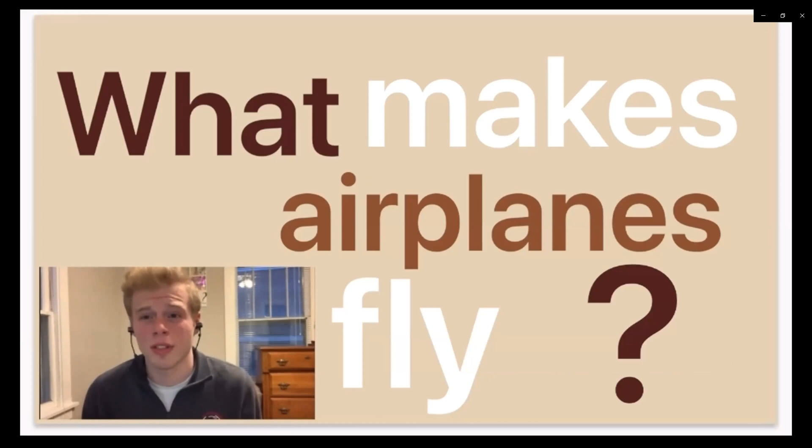I want answers from you guys. I know that when I make paper airplanes, if I throw them good enough, that they fly. Maybe if you throw something, it'll fly, but it probably won't fly very far unless you throw it really, really hard. There's four main forces that go into making something fly.

We're going to talk about each of those in detail. The first force that you need in order to fly is thrust. You have to be moving pretty fast in order to fly anywhere. You don't see a whole lot of really slow planes.

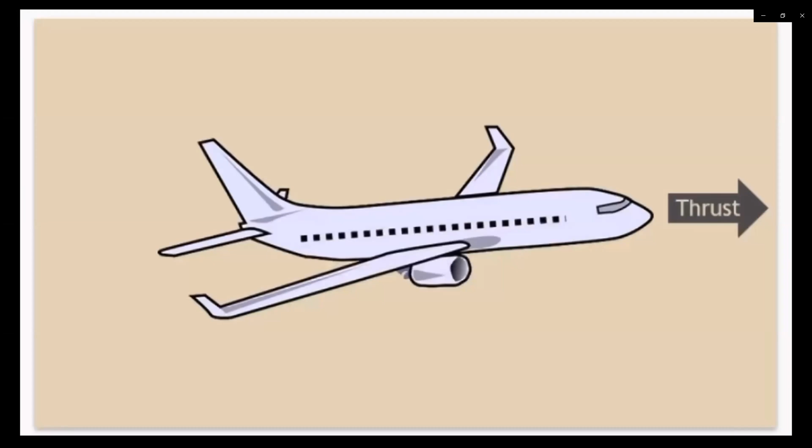A second force that's present in all types is drag. And drag is basically the friction that the air causes when it runs into the plane. We'll talk about that a little bit later.

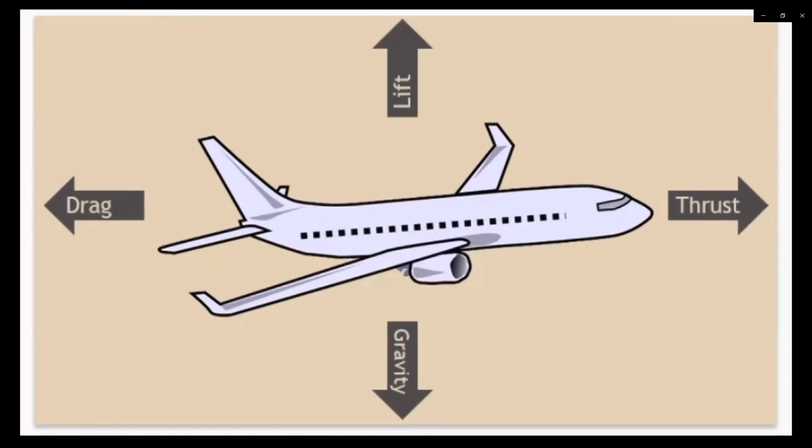A third force that's present anywhere on the world or anywhere on most other planets is the force of gravity. Gravity pulls you down and keeps you from staying in the air. And the fourth and final force we're going to talk about is lift. If you don't have any lift pushing you up, gravity will always keep you down on the ground.

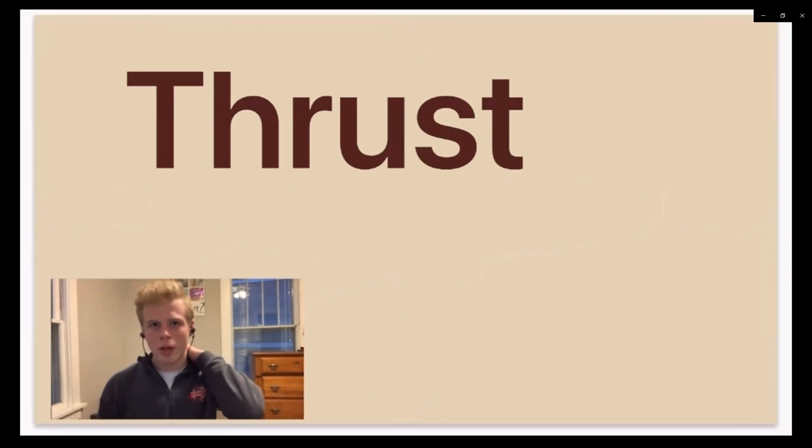First, let's start by talking about this force of thrust. Now, in order to understand thrust, we need to understand the principle of inertia. Newton's first law of motion says that objects that are at rest tend to stay at rest. And this basically is where the idea of inertia comes from. Inertia is this idea that if an object is doing something right now, it's going to want to keep doing that something in the future.

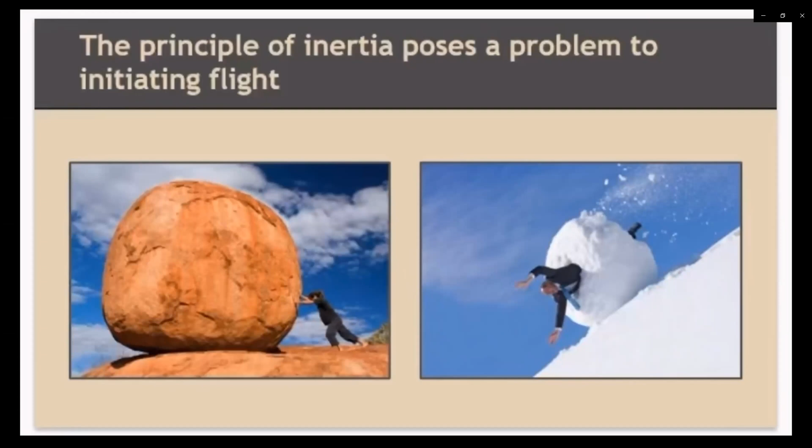So you're going to need some pretty powerful forces to get an airplane moving in the first place. The Wright brothers used very light materials in order to create enough thrust to overcome inertia. And so their plane wasn't very heavy at all. They used, as I said earlier, canvas and wood in order to make this plane really, really light.

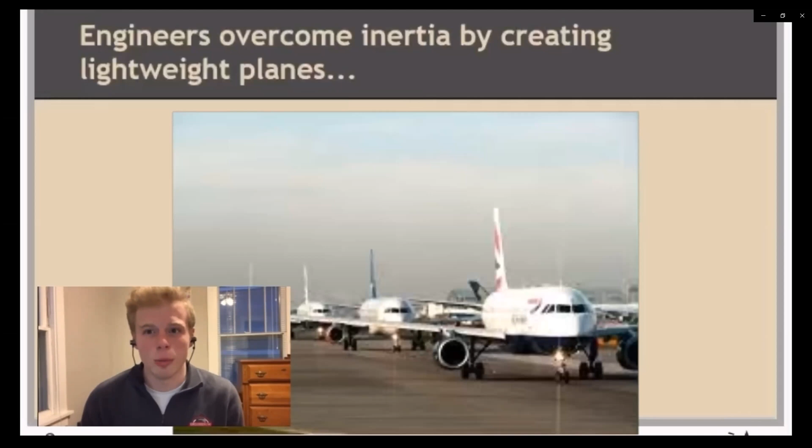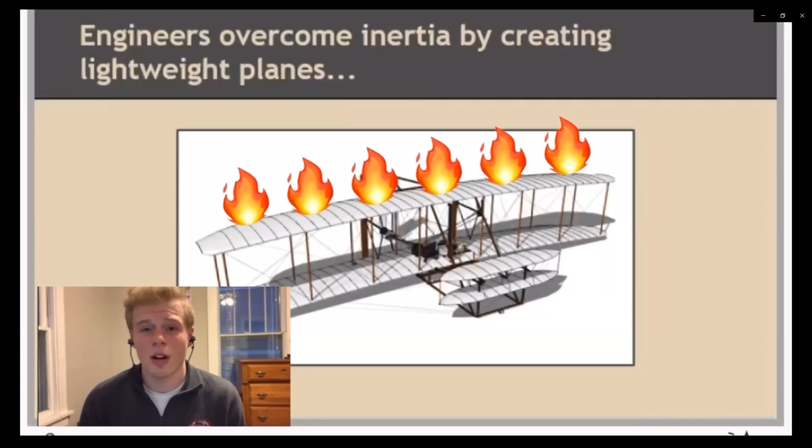And you've noticed, if you've ever been to an airport or maybe even been on a plane, that there aren't very many planes made of canvas or wood anymore. And the reason is, as engineers have found better and stronger materials, they found out that materials like metal and aluminum are actually a lot stronger than canvas and wood, and they're a lot less likely to catch on fire than canvas or wood, and they're also not all that much heavier for the amount of material that they can carry.

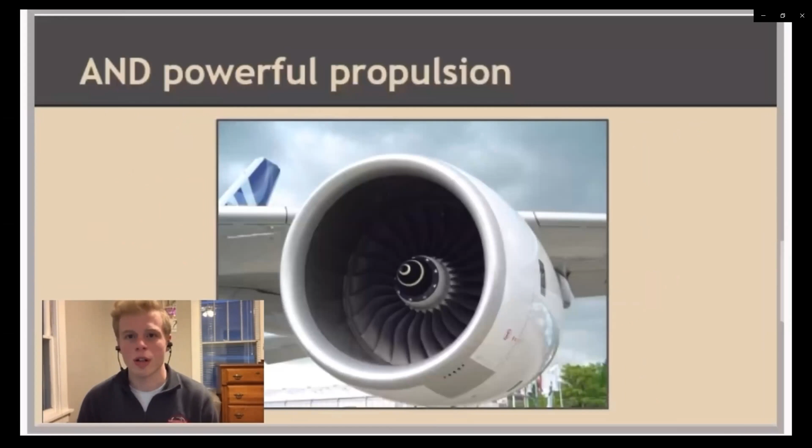So engineers have constantly been designing lighter and stronger materials in order to make the plane weigh less, which makes it easier to fly through the air. It's also really important to have powerful propulsion. The Wright brothers didn't really have any type of propulsion on their planes—they just relied on wind and catching wind in the actual canvas of the plane. But today's planes use powerful jet engines to push themselves forward and give themselves that forward thrust we talked about. All right, so the next force we're going to talk about is drag.

Drag is a result of air resistance. How many of you have ever stuck your arm out a car window while going pretty fast, and your arm wants to immediately go backwards? Well, this is actually air resistance acting on your arm. The air molecules don't really want to be moved around too much, and those push back on your arm, pulling it in that backwards motion. This same phenomenon is also happening to planes in the air. The drag is slowing the planes down, which is usually seen as bad.

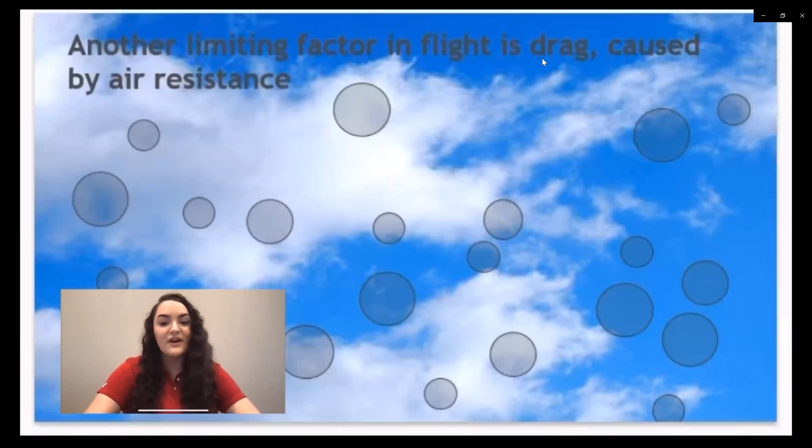However, drag can be reduced with an aerodynamic design. So what is an aerodynamic design? Essentially, it's a design that lessens the drag or air resistance. So what makes something aerodynamic, you might ask? Things like a sleek model, some divots, and a smooth surface are all really good examples of what makes something aerodynamic. Next, we're going to show you a short video to further explain aerodynamic design and how it works.

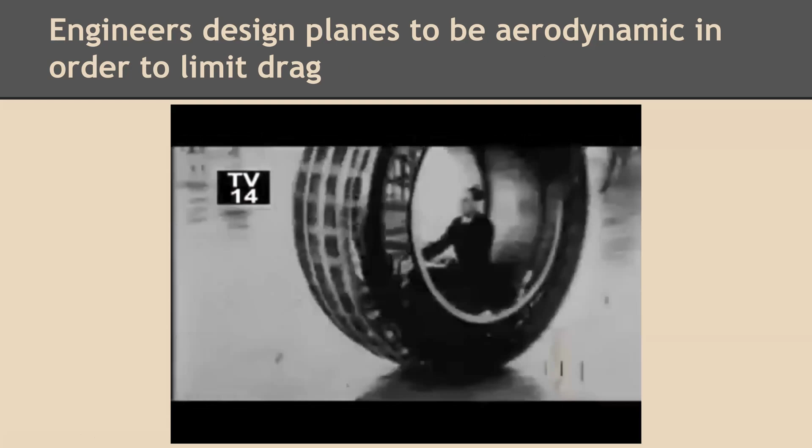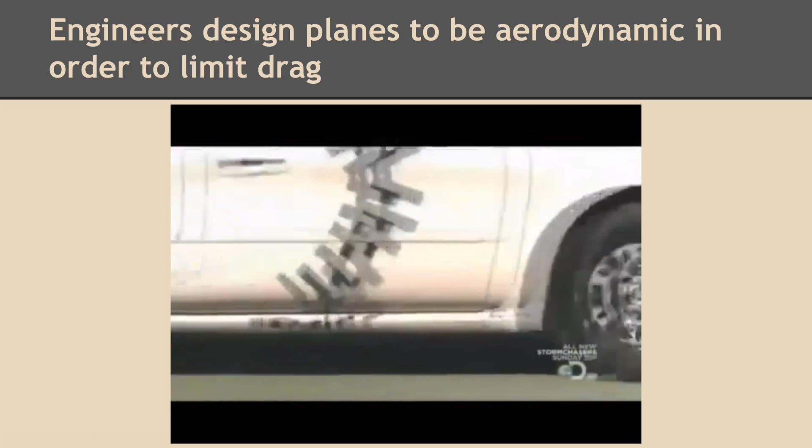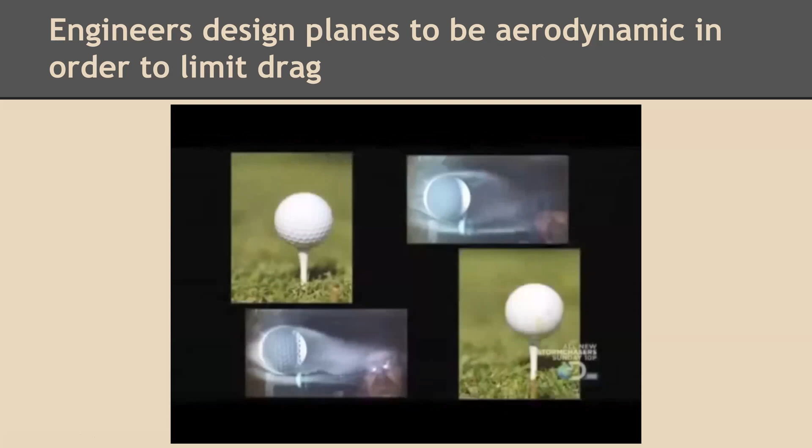Every year, millions of dollars are spent perfecting the aerodynamics of planes, trains, and automobiles. But have the MythBusters stumbled upon a dirt cheap solution? Thanks to a car riddled with dimples, it looks fantastic. Adam and Jamie have one more dirty trick to try. Remember, it's the dimples on a golf ball that cut down its drag and make it fly further.

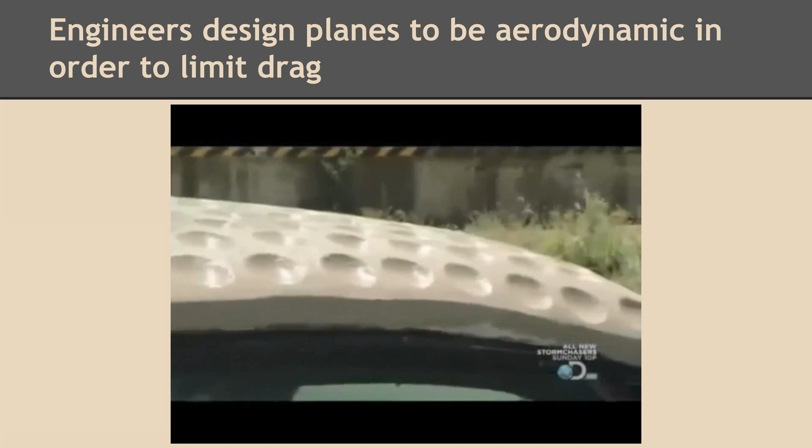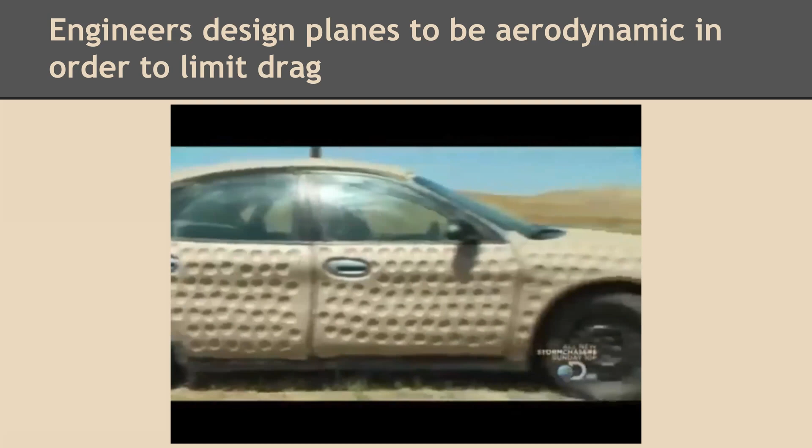So by covering the clay with these dimples, that's one dimpled car. If ever there was a car that looked like a golf ball, this is it. It might make the car more aerodynamic. This is by far one of the stranger things we've ever built, and to my mind actually one of the most beautiful, and not aesthetically either. The beauty is that we've taken the phrase 'golf ball-like effect on the car' to the furthest possible point. No one can accuse us of not going far enough.

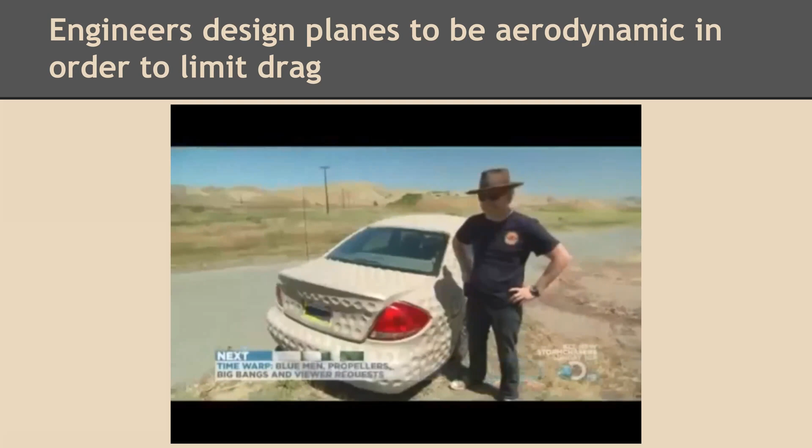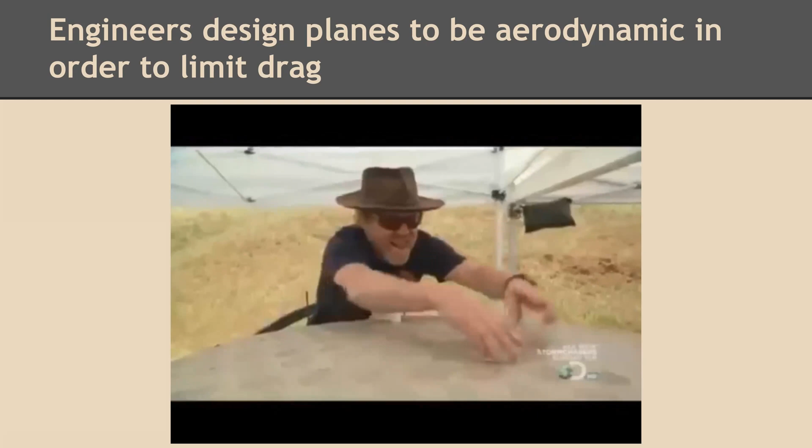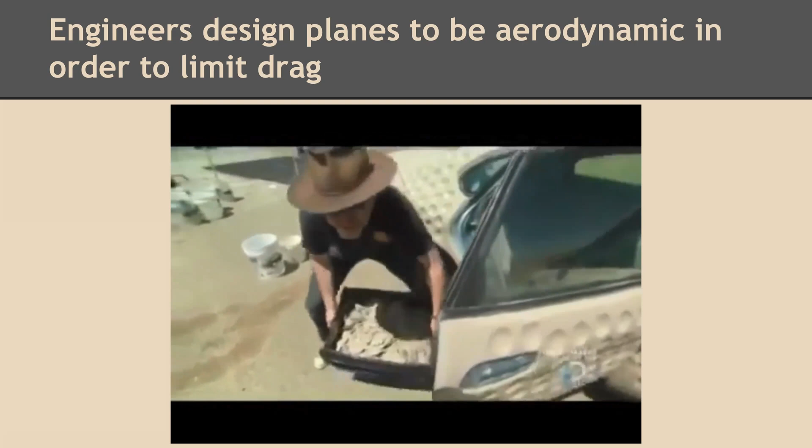Is this treatment going to translate to better fuel efficiency? I really don't think so. Adam's got his doubts, but before they test, there's one thing to make clear. Adam, I hear you say, you cut out 1,082 dimples worth of clay that significantly lightened the weight of the car, and that might translate to better fuel economy. Ye of little faith—for look here, we have every dimple we've cut out of this car, and back in it goes. Thought of everything.

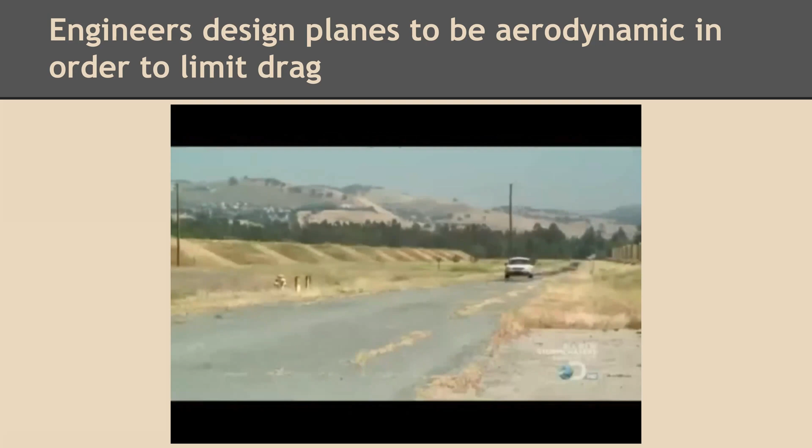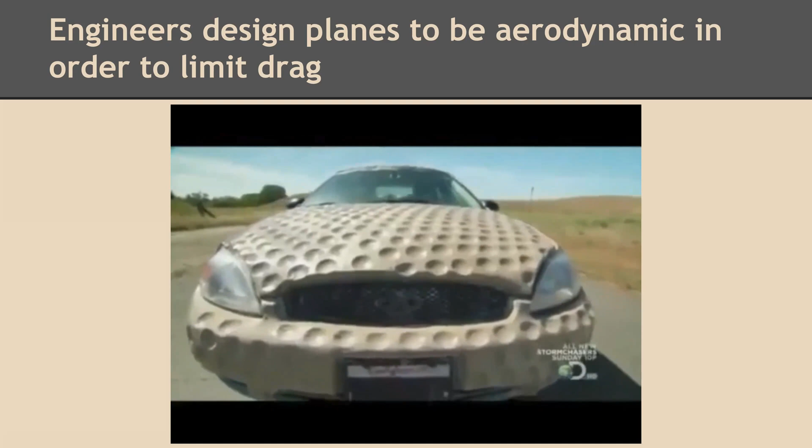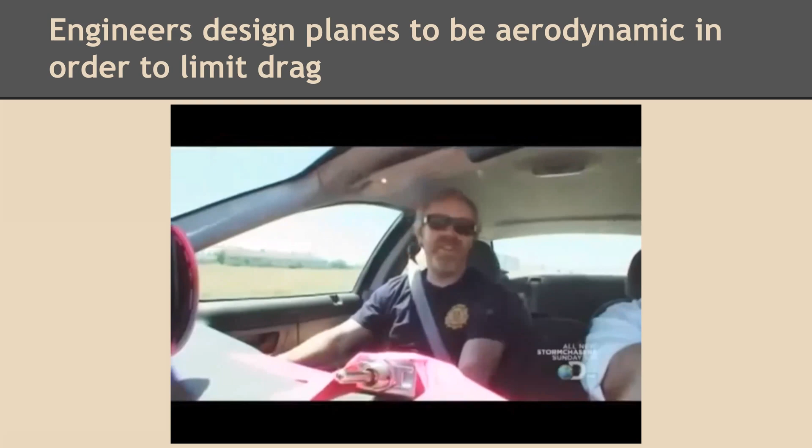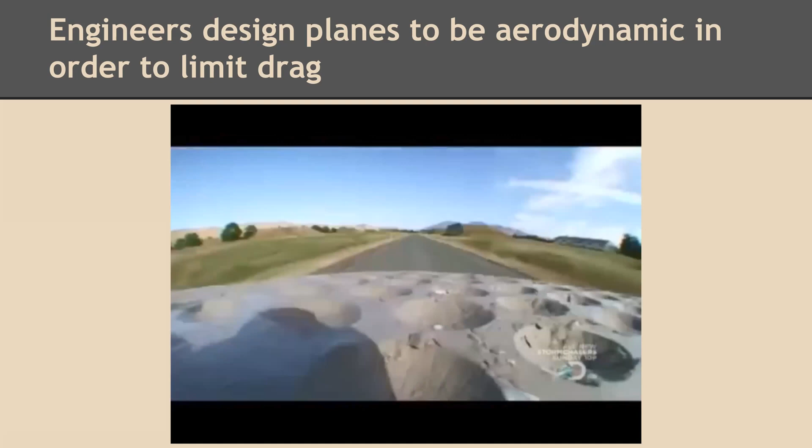Yep, everything. But will those dimples make a dent in fuel consumption? 9,450 grams, that's our start weight. Well, by now you know the drill. Main tank solenoid is on. Let's go, dimple car. Thing really is lovely. It's better from a distance. What's funny is this is absolutely the category of things that work only as long as we need them to work—it's just going to start slopping whole body parts off any minute now. But despite 5 runs at 65 miles per hour, the clay catastrophe never comes.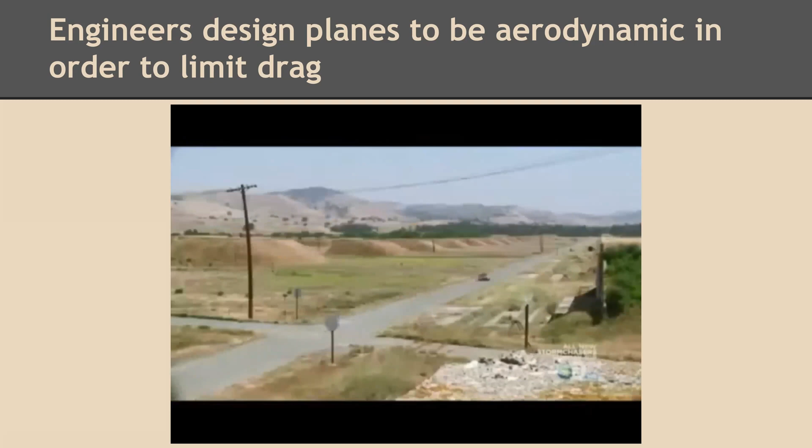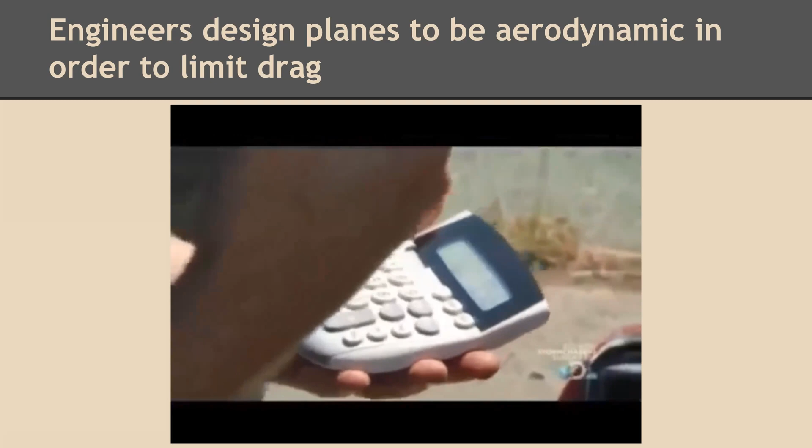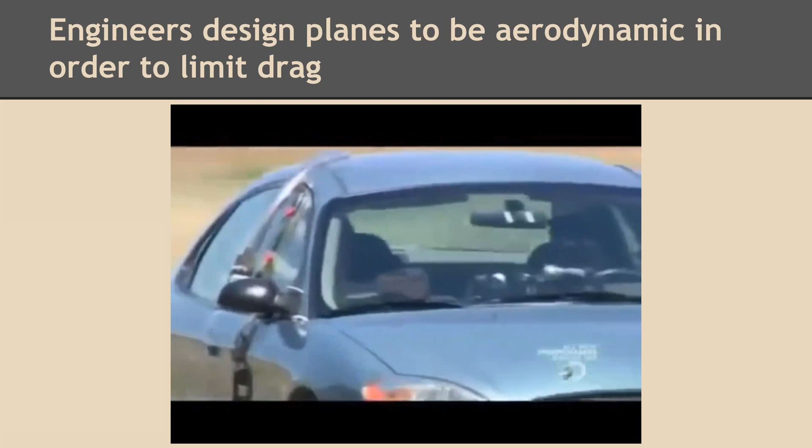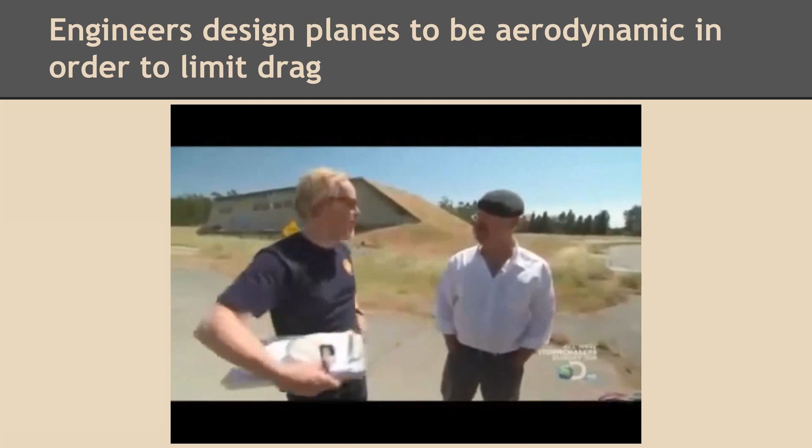So it's over to Adam. 8,972 grams. All right, time to do a little math. What you got? Okay, so the clean car without any clay on it was 26 miles per gallon and change. The clay car with no dimples was 26 miles per gallon and change. The dimpled car, 29.65 miles to the gallon. There is a golf ball like that. I feel like eating my beret. And, I'm not gonna.

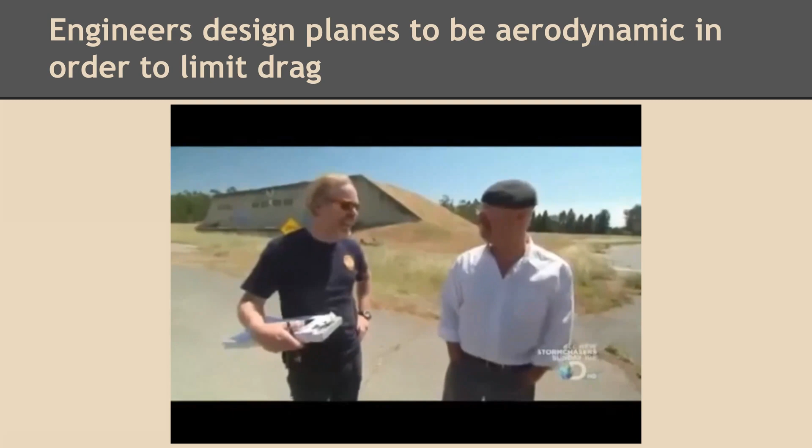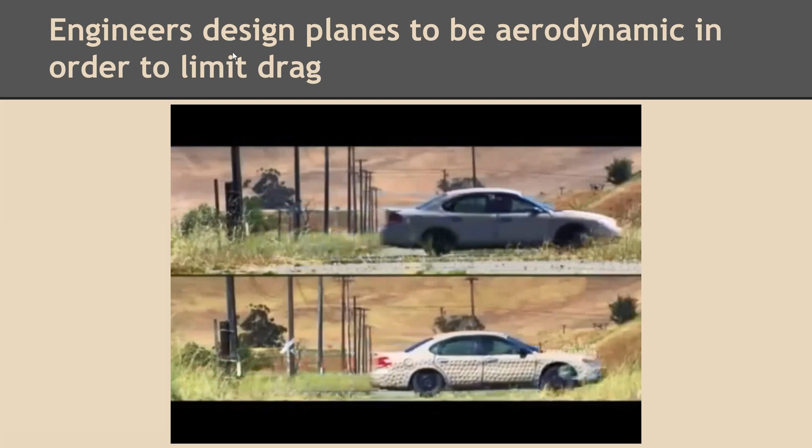We totally didn't expect that result. If we had to bet—and not being a betting person, I didn't—but if we had to bet, we would have both said, if anything, this would get poorer mileage. Like, we should have gotten something like the dirty car did. That's the coolest thing ever.

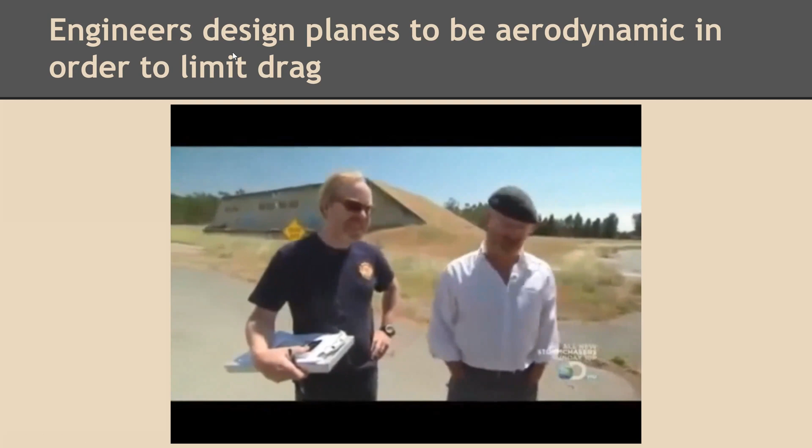To explain aerodynamic design and how it works.

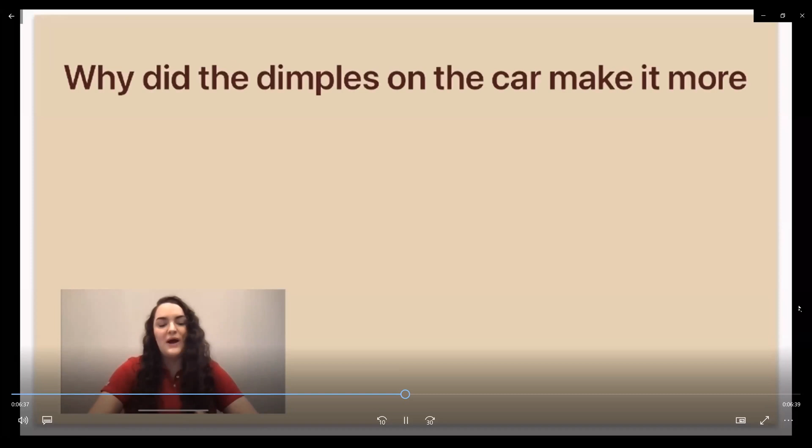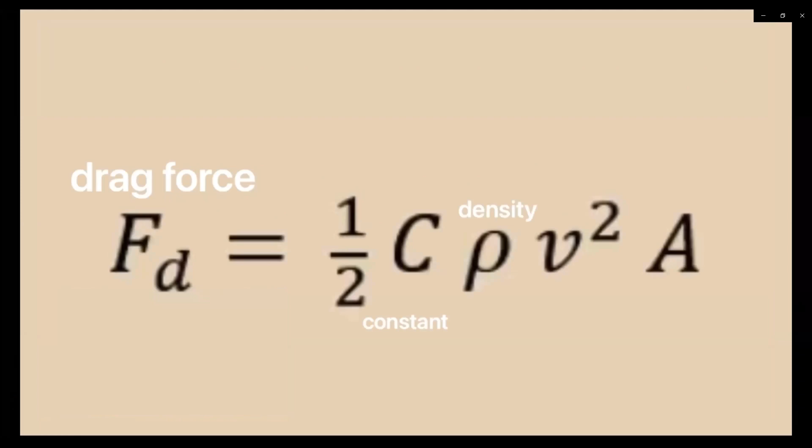Now, after watching that video, who can tell me why the dimples on the car made it more aerodynamic? Well, if you said it was reducing the surface area, you're exactly right. This can also be seen using the equation: force of drag equals 1/2 times c, the constant, times rho, known as density, times the speed, also known as velocity, times the area. Essentially the dimples are reducing the surface area of the car because when air flowed over the dimples, it had little to no friction. The air in the dimples rubbed against the air flowing over the car less than the actual car surface itself.

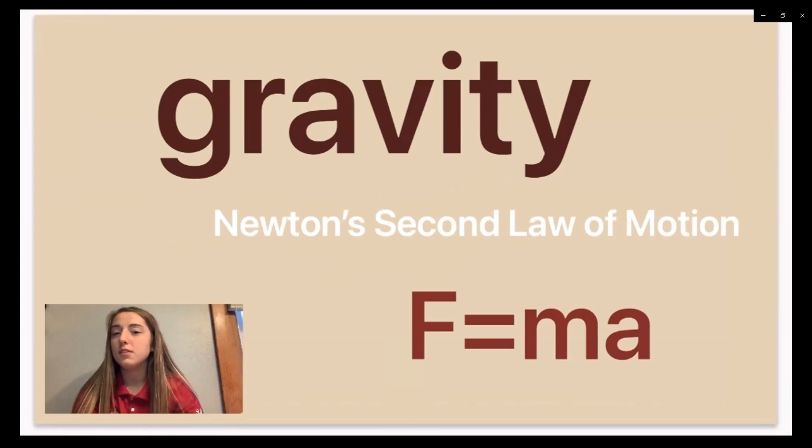The next force we have is gravity. Now we know gravity as the force that keeps us stuck to the earth. And according to Newton's second law, force equals mass times acceleration. In this case, our mass is somewhat similar to our weight, and acceleration is how fast we're speeding up.

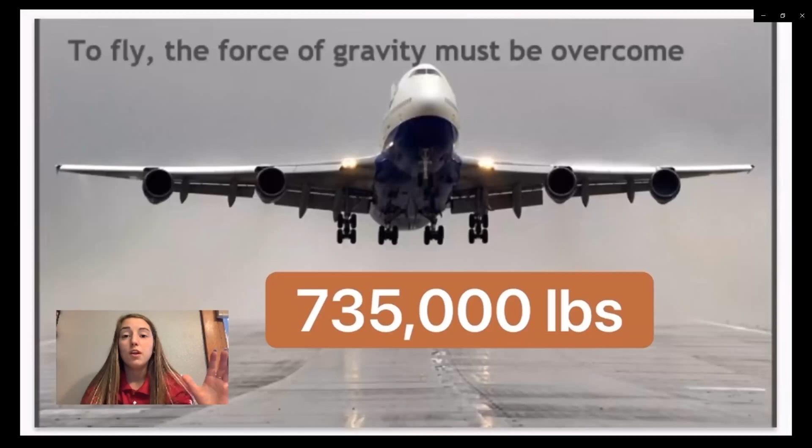Like we talked about earlier, planes have a huge mass, and so they have a huge force of gravity that has to be overcome. The force we use to overcome gravity is lift. We create this large lift force by creating a large thrust force from the plane's engines. The most important part of our planes for creating lift is the wings.

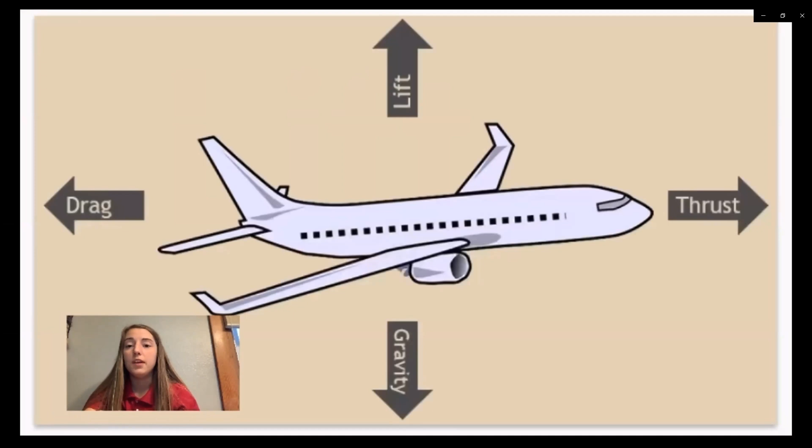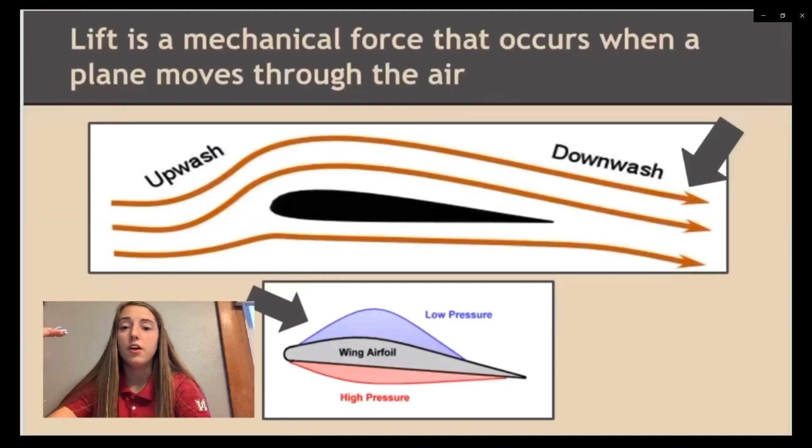These wings move air across them and create something called downwash. Downwash is where the air comes up over the wing and rushes back down the other side. This downwash causes an area of low pressure above the airplane wing, and a high pressure pocket below the wing. When you have low pressure on top and high pressure on the bottom, that lifts the plane up into the air and creates what we know as lift.

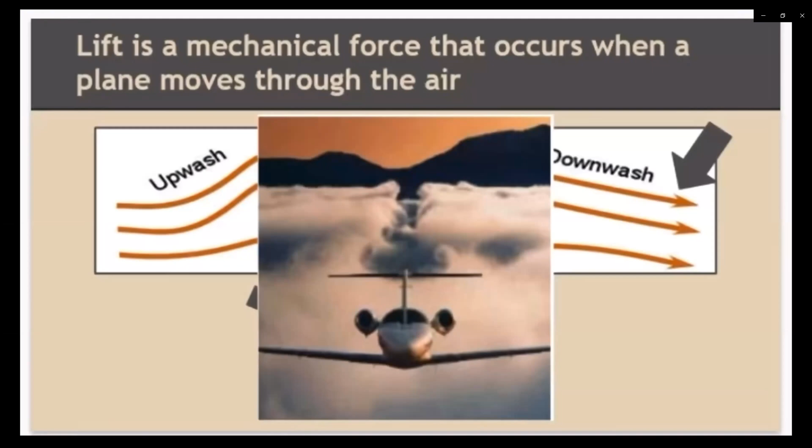Let's take a look at an example of the Bernoulli Effect in action. I have a really light ping pong ball here and a pretty powerful hairdryer. This hairdryer is going to blow a lot of air past this ping pong ball. Let's see what happens.

What was happening is all that air was rushing along the ping pong ball and it was creating lift on the ping pong ball. That's how it was able to overcome the force of gravity. It was able to create a pocket of low pressure right above it where all this air is rushing past, and the ping pong ball wants to go where it's easiest and where there's less pressure. So it was constantly being pushed up by the hairdryer, and that's why it was able to stay in line with the dryer, even when I started to tilt it a little bit, because it had that pocket of low pressure right above it.

I have a video here that I want to share with you. Before you watch it, I want you to guess: how long do you think the longest paper airplane ever flown was in the air?

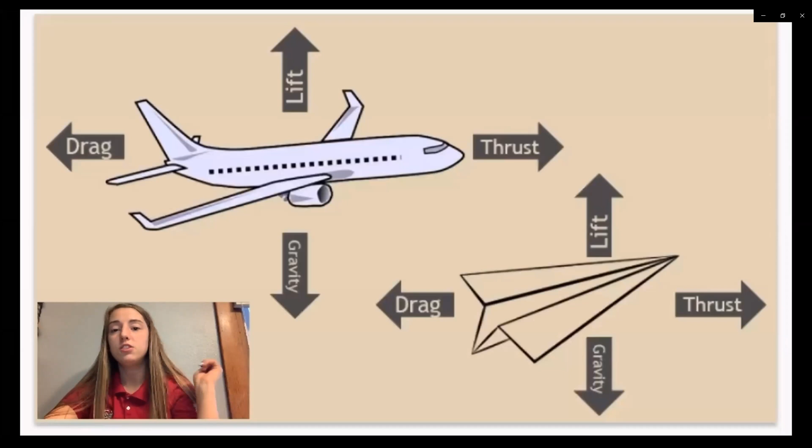Now later, we're going to do an activity where you make your own airplane. Your airplane, although it's not going to look like the huge airplanes we see in the sky, it's going to look like a paper airplane. Keep in mind, these airplanes have the same four forces acting on them: drag, lift, thrust, and gravity. The only difference is that our thrust comes from us taking the plane and launching it into the air rather than using a super special jet engine.

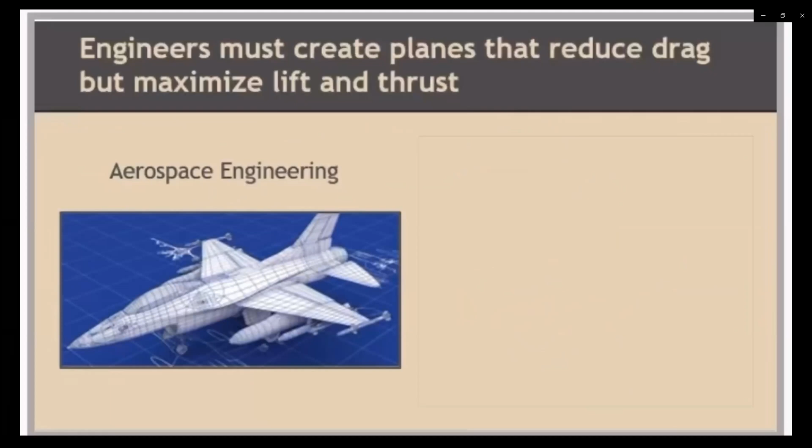Let's take a look at some of the engineers that study these forces acting on airplanes. Their goal is to reduce drag but maximize both lift and thrust. The first engineer that works on an airplane is an aerospace engineer, which is broken up into two spots: aeronautical engineering and astronautical engineering. Aerospace engineers must determine the best shape for an airplane. To do this, they must predict how the air is going to move around the plane and around the wings, using computer models and mathematical models, and then testing them in a lab.

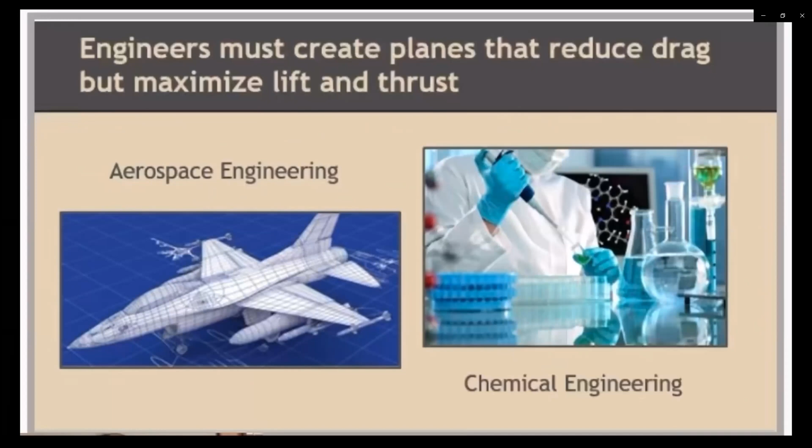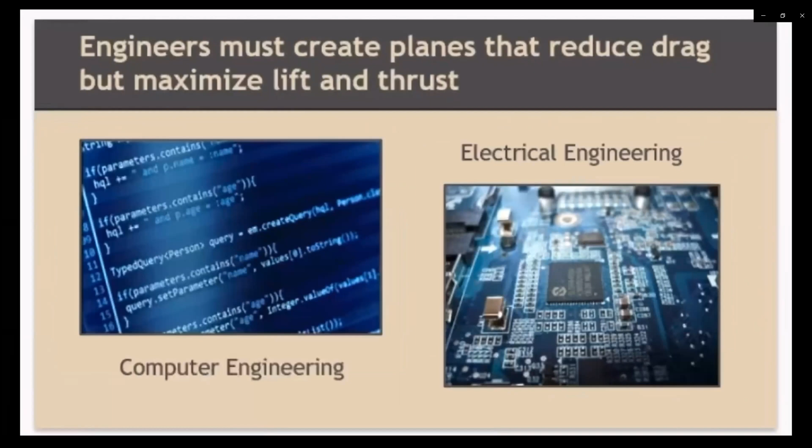Chemical engineers study both physics and chemistry, and they study this concept called combustion, which is where we get the energy for our planes from, using jet fuel. They use their studies to maximize the energy we get from this combustion process. Computer engineers design the computer programs for flight instruments, while electrical engineers work on all the pieces behind the computer, like the electrical wiring.

Earlier we talked about how heavy airplanes are. They are just so heavy, and the job of a materials engineer is to minimize that weight, making sure we use the lightest materials possible that also keep our passengers safe.

Next, we have mechanical engineers, and what they do is work on moving parts. There are lots of moving parts in an airplane, like the doors and the wings.

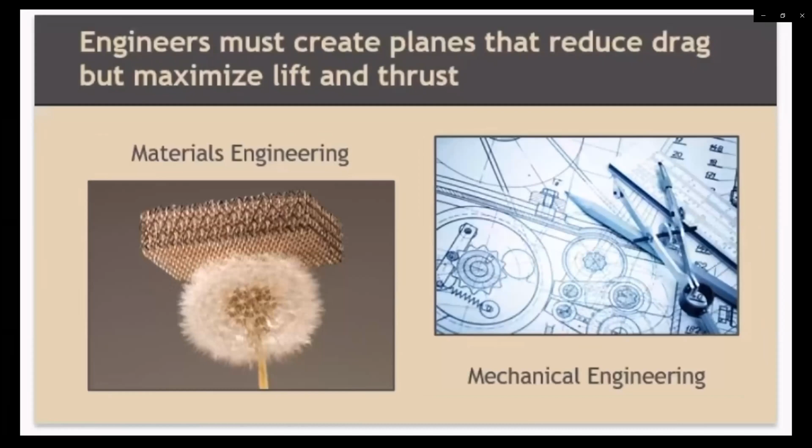Engineers are always improving and always making new, safer, more fun innovations in the area of flight technology. Today we're going to take some of the processes and ideas we learned in this video and do our own activity: we're going to make paper airplanes.